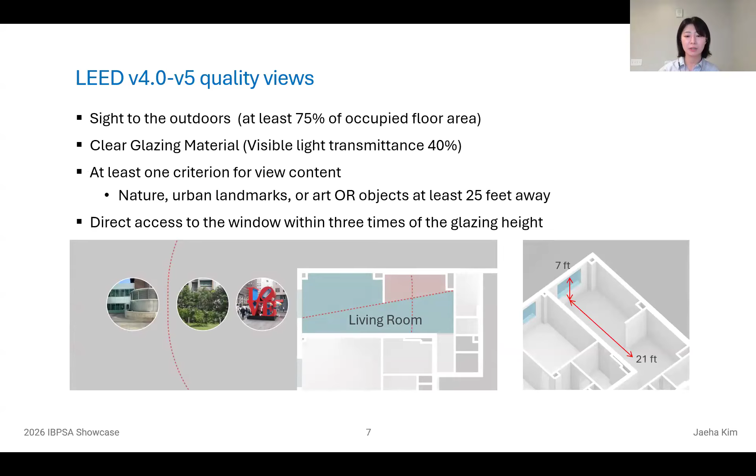Current view quality evaluation standards are very limited. LEED has a binary pass or fail system based on things like outdoor sightlines, glazing transmittance, and view content. The European standard EN 17037 is more nuanced. It rates view across 3 levels based on horizontal sight angle, distance to visible objects, and number of visible layers like sky, ground, and landscape. But the critical question is, do these match how people actually experience views?

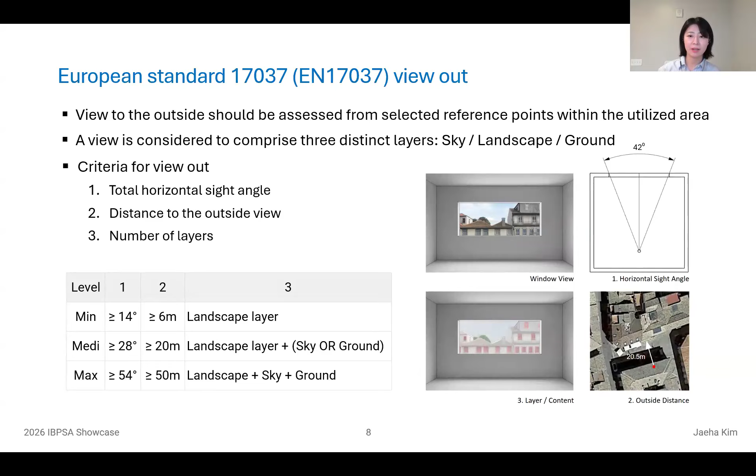Let me show you why the answer is often no. Here's a real housing project where the architect carefully designed window sizes and positions. LEED said all floor area qualifies, and according to the European standard simulation results, most of the area has failed. But when you look at the actual view image, it's a thoughtfully designed space. These oversimplified criteria miss a lot.

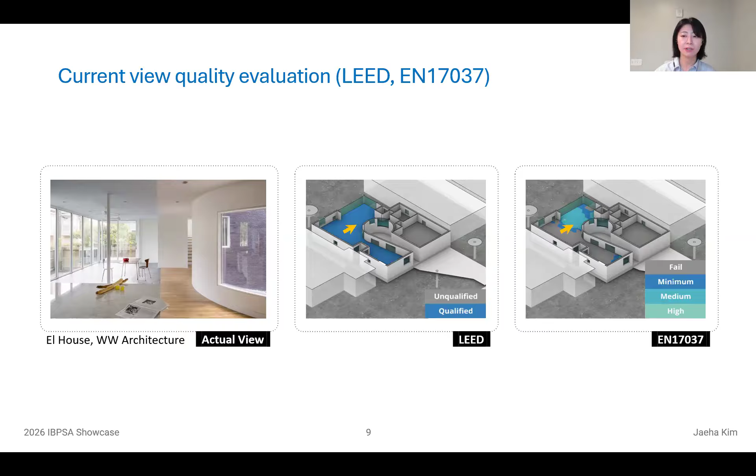We need something better. However, the scale of the challenge is staggering. To test all the relevant combinations of view factors, window dimensions, room types, and spatial conditions, we need to evaluate almost 86 quadrillion scenarios. That's obviously impossible for one research team. So we've built a collaboration across Cornell, UC Berkeley, New Jersey Institute of Technology, and Singapore University of Social Science, with a shared protocol for systematic data collection.

Before collecting data at scale, we need to know which experiment method actually works. We compared physical space experiments, virtual reality, and online image surveys across 5 satisfaction categories. The key finding: for measuring view content and overall satisfaction, digital image and virtual reality experiments both work as well as physical space experiments. That means we can scale up data collection dramatically without sacrificing validity. This is the foundation everything else builds on.

Using our validated protocol, we collected over 13,000 human satisfaction ratings and built the Window View ImageNet dataset. The surveyed responses show a clear, consistent trend. Large windows with sky views score highest. Small windows facing neighboring buildings score lowest.

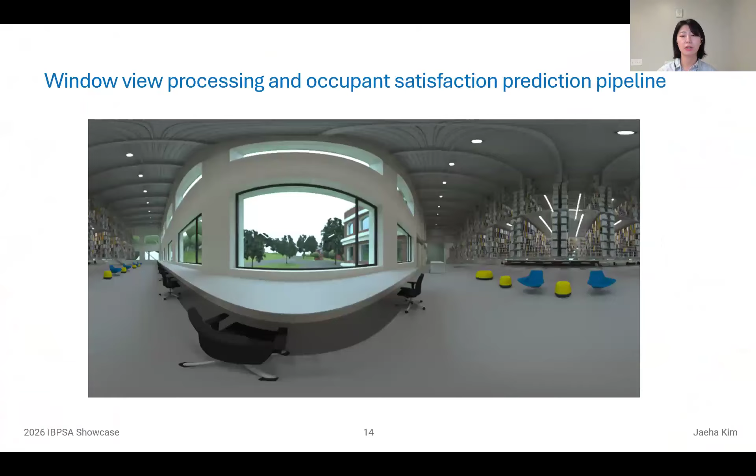To extract features from these images, we use semantic segmentation to identify object types such as tree, sky, building, roads, and depth estimation to measure how far those objects are. The pipeline crops to the human vertical field of view, extracts 23 spatial and visual features, and feeds them into an AutoML workflow using gradient boosting models. We link those features to the human satisfaction scores and train the model. The result: a system that can predict occupants' view satisfaction from a 3D model alone.

To test whether our model generalized beyond the lab, we ran an in-person experiment at the Hasbrouck Apartments here in Ithaca. 24 students toured 16 views in person. 282 US residents rated the same views online. The ranking of preferred views matched, with no statistically significant differences between students and the US population. And when we looked into demographic effects, we found that women rate views slightly lower than men for the same scenarios, and older adults tend to be more sensitive to privacy. These are real design implications, especially for senior housing.

We then tested the model in a much more demanding context: 24 residential units across 12 building archetypes in New York City. 66 participants spent 2.5 hours rating views in person. When we compared their satisfaction scores against our model, called View Score, against LEED and the European standard, the results were clear. View Score achieves a correlation of 0.68 with human satisfaction, which is higher than LEED and European correlation coefficients. On our validation image dataset, the ML model explained 81% of human satisfaction variance, with only a 9% error rate. For something widely considered immeasurable and subjective, this is a meaningful result.

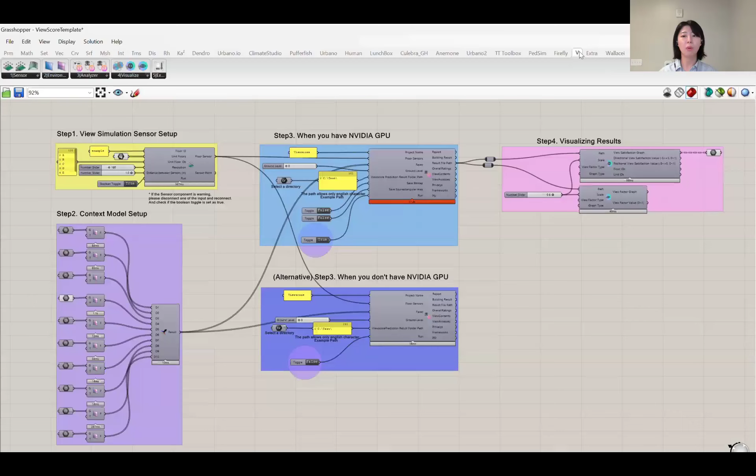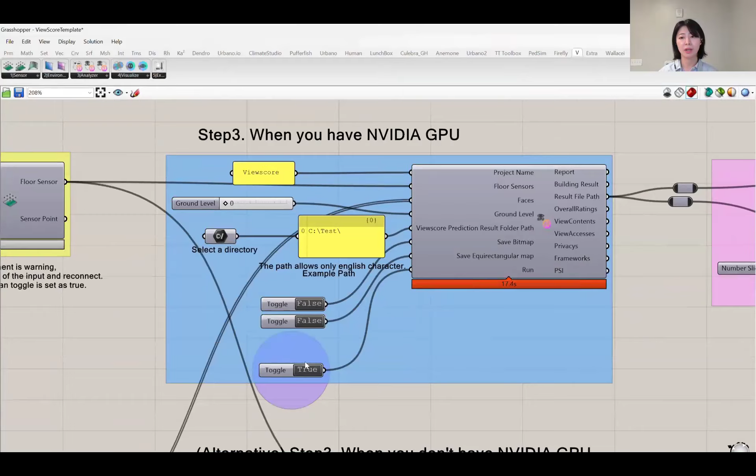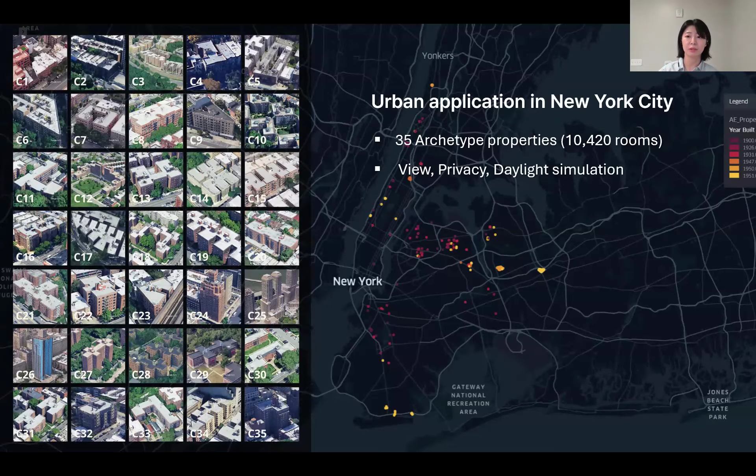Finally, we applied ViewScore at the city scale. In collaboration with a New York City property management company, we simulated view, privacy, and daylight across 35 residential building archetypes, totaling 10,420 rooms. The findings are sobering: 71% of rooms have unsatisfactory views, and over a third of floor area has visual privacy issues. Building density is the dominant driver of view and daylight quality, while privacy is largely floor-level dependent. We are using these results to establish evidence-based benchmarks that can inform both design practice and housing policy.

To wrap up, what I've shown today is a workflow for turning subjective human experience into a quantifiable, simulatable design variable. We started with views, but this same pipeline can apply to acoustic quality, texture preference, spatial comfort, any qualitative factors that matter to occupants.

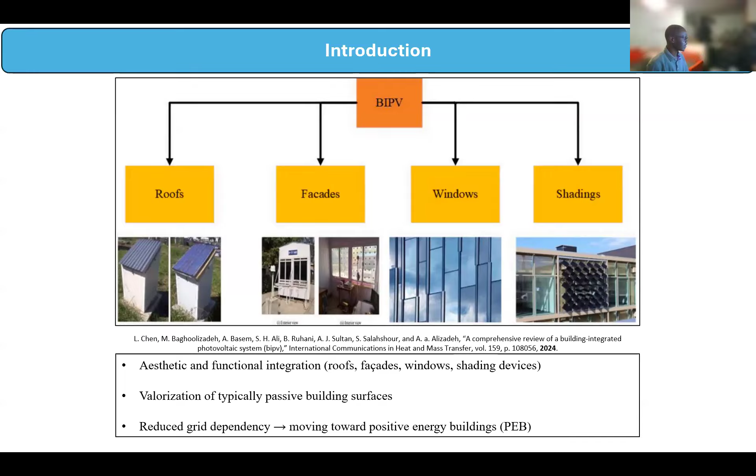The BIPV consists of integrated PV modules in buildings, and it enables producing more energy. Now we are using this PV in every way in buildings, like in the roofs, facades, and windows. For people who work on developing artificial models to predict PV systems, it's interesting to have PV data sets for the production of buildings—for example, every 5 minutes or 10 minutes—to develop predictive models.

Now I'm moving to the proposed solution. Our simulator uses many types of data: the modules or the PV panels, the consumption profile of the building, and some meteorological data of where the building is located. We also integrate some financial parameters and the panel dimensions, and identify the blocked area, which is where we can't integrate a PV module in the building dimensions.

So we're going to do some processing and sizing here to generate the physical optimal capacity and the capacity we need. We're going to run an optimization process to have the most efficient cost and to rank the modules to find the best ones to integrate in the building. Finally, we're going to generate a 3D representation of the modules in the buildings.

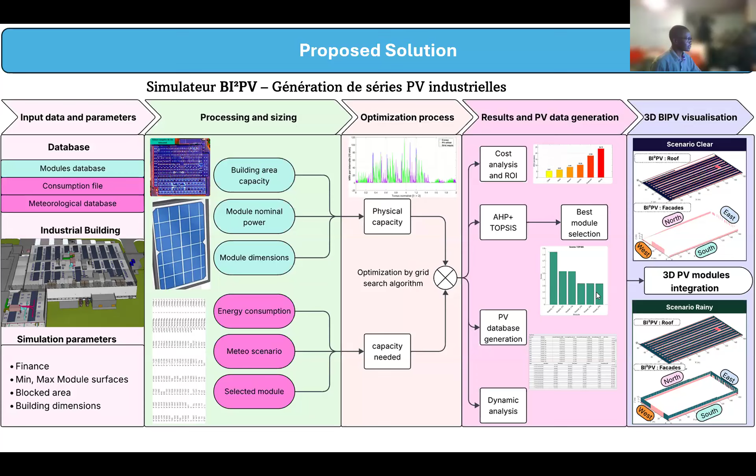So we have also many scenarios, like if we are in the clear sky, or if, for example, we are in the rainy climatic zone.

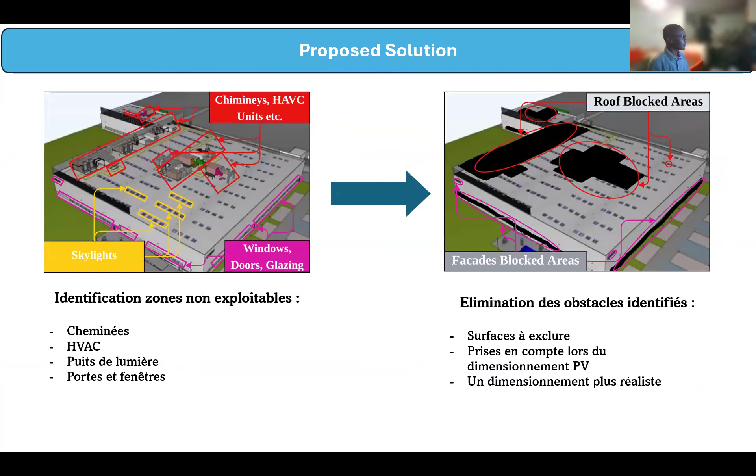Here we have some illustration of how our simulator works. So we identify all the blocked areas, and after that we do this for the integration of the PV integration.

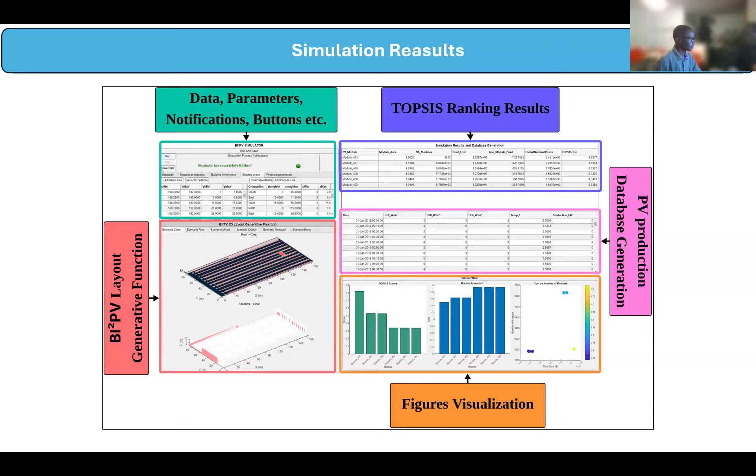After the simulation, we have the 3D representation. The most interesting thing in our simulator is the dataset we get at the end of the simulation, and it enables us to develop an AI model to predict the production of the building, which we use later for a smart, predictive energy management strategy system.

So here we have a video to show how our simulator works. Here we have the database we have to integrate. Here the meteorological database.

So here we load the database, and for the consumption also. And here we are also going to load the database for the blocked areas.

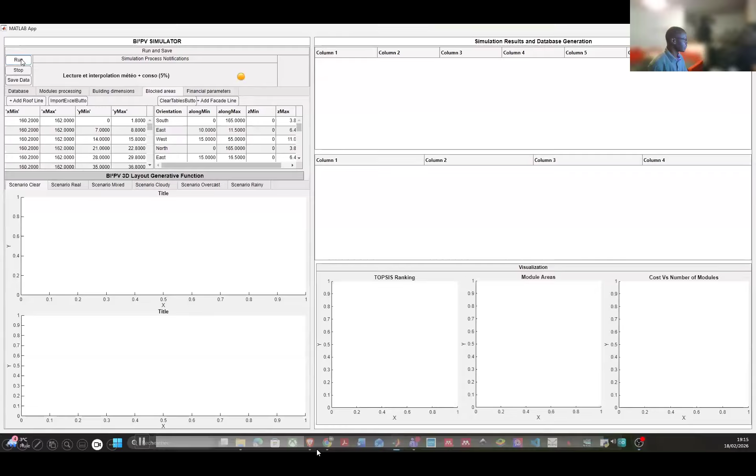And we run the simulation here. So we can see the progress of the simulator.

This simulation was developed with MATLAB App Designer. At the end of the simulation we have the ranking of the 5, or actually 6, best modules, and here we see that module 451 is the best one, and we use this to integrate in the simulation.

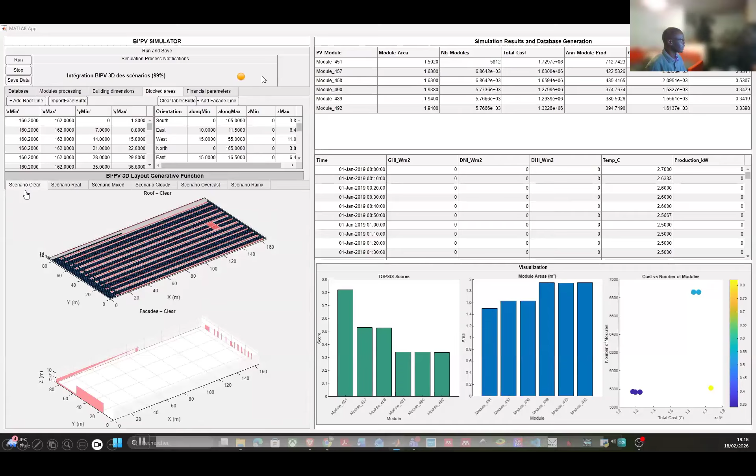So here we have all the scenarios. Here is the clear scenario. Here we have the real one, and we have others like, for example, the rainy one.

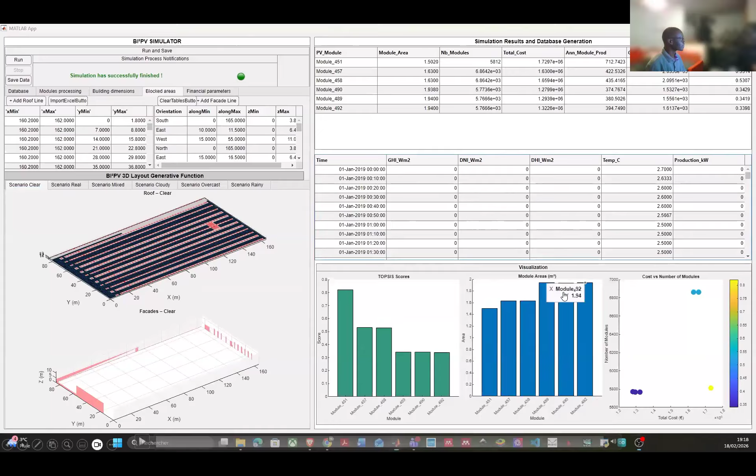And here we have the database of the PV production every 10 minutes for 1 year. And here, for example, for the real scenario, we have more than 5,000 panels to integrate on the roofs and the south facade only.

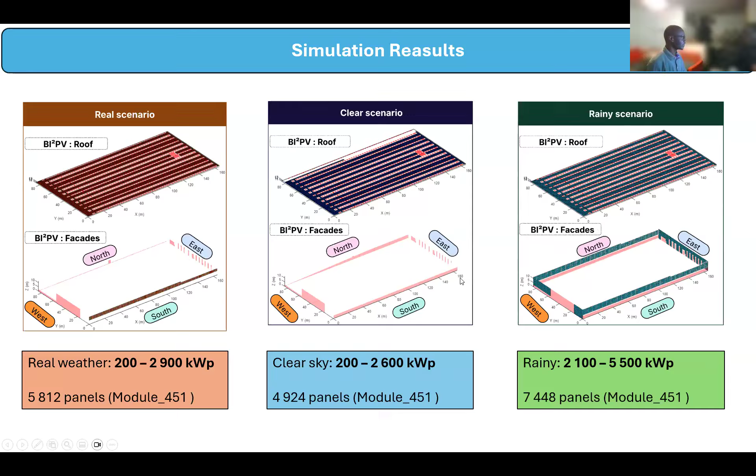And for the clear scenario, only the roofs were exploited, and for the rainy scenario we need more panels, so we use all the roofs and all the exploitable area on the facades.

So for conclusion, this simulator was developed in MATLAB App Designer, and we use the whole workflow, going from the weather data, to scenarios, to the models, to the optimization of surfaces, and economic validation.

A multi-criteria decision framework based on AHP and TOPSIS was also used. For the capacity, for the clear sky scenario with mini modules, we can go from 200 to 2600 kilowatt peak, and for the real weather, from 200 to 2900 kilowatt peak.

So the best compromise for the real scenario is Module 451, and we had a return on investment of 6.45 years. We also have the dataset, and this work was published in the Energy and Buildings journal.

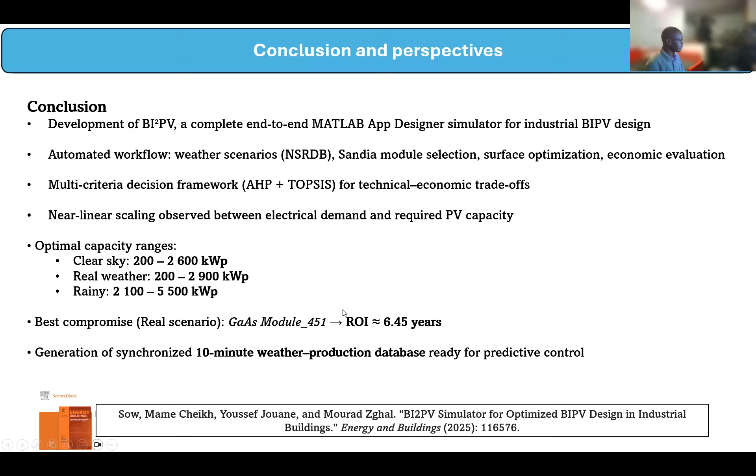For the next work, we are going to use the database to develop our predictive energy management in PV grid systems.

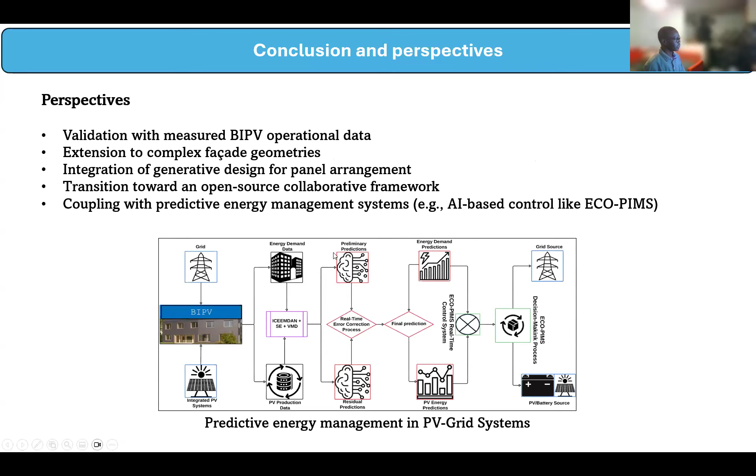We're also trying to work on this simulator to develop an open source version, to enable others to have free access to this simulator. Thank you for your attention.

Thank you so much, great job. I'm curious if your tool is going to be available to the public or if it already is.

Is your tool available for other people to use, or is it mainly internal use right now? Right now it's not, because it's only usable in MATLAB, so if you don't have the license, it's complicated to use.

So we're trying to work on it, to translate the code, for example, into Python, and to develop a free version for everyone, especially for students to use it.

And for industry, for example, if industrial users want a tool to know how to integrate some PV modules in their buildings, yes, it's usable.

Got it, thank you. Well, great job, thanks so much.

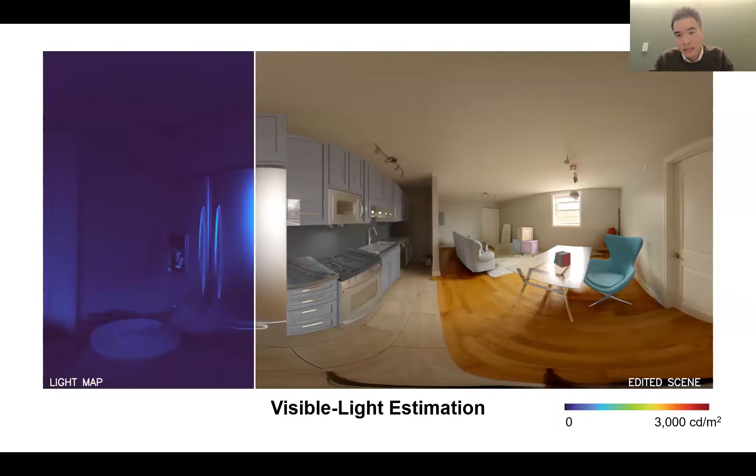From left to right, it's from captured scene to edited scene. So it's more like a visualization, and in this process we don't need any commercial software. And specifically for building performance, we care about the absolute light level. So here we also care about the illuminance. From left to right, we can convert the rendered image into absolute scale.

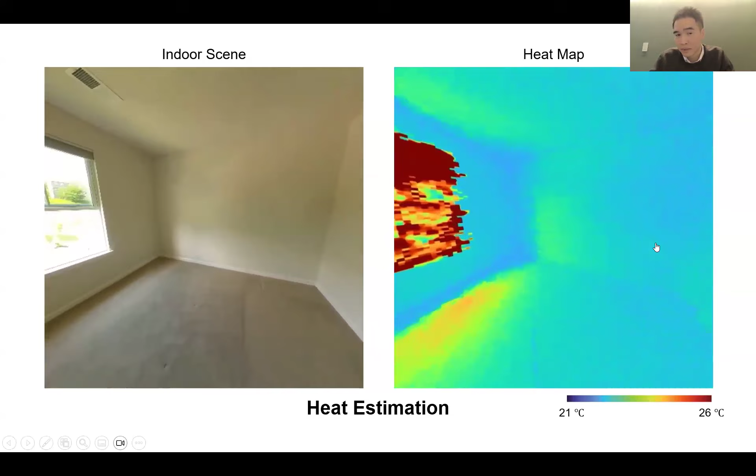And next, because light also brings heat, for this project we are also trying to estimate indoor heat from visible light. So we assume all the heat comes from outdoor and comes from sunlight. And we can easily crop the panorama into a 2D perspective view and see the whole space from 360 degrees.

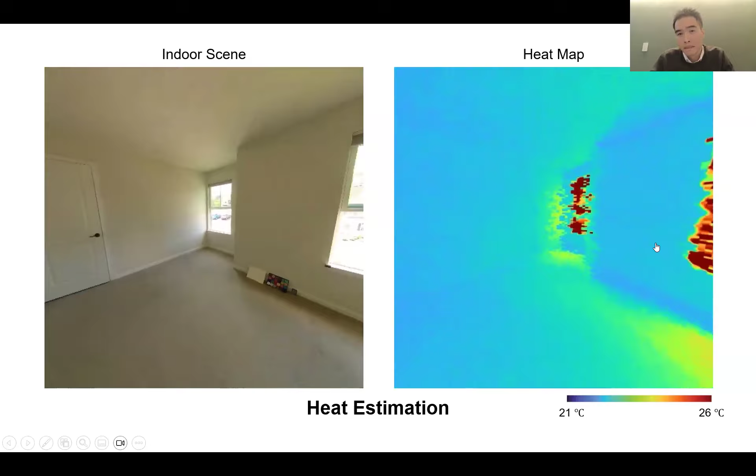Next, about the background. For this project, we mainly focus on the housing market in the US, especially existing homes. By the third quarter of 2024, we have over 147 million housing units, and specifically over 4 million existing homes on the market. So we have millions of homes, but we don't have millions of architects or practitioners in building performance simulation, right? So we need something easy and simple to estimate the light and heat.

So in this case, we focus on image-based tasks, and we are trying to understand what's going on from the image. Let's say here's a single panorama. A lot of existing studies detect the wall corners and generate this shoebox model. It's a simplified model, and all the textures are classified into the wall and floor planes. In the meantime, other computer vision and graphics studies can classify indoor objects into different categories. Here we can see the door, floor, and the ceilings, all labeled in different pixel colors.

And if we could capture a single outdoor image, we have both indoor and outdoor information. We can estimate the indoor shading layer, and we can estimate the indoor material properties. So we have a lot of information so far. In this study, we are trying to build a design and simulation pipeline, trying to understand the physics behind the RGB image.

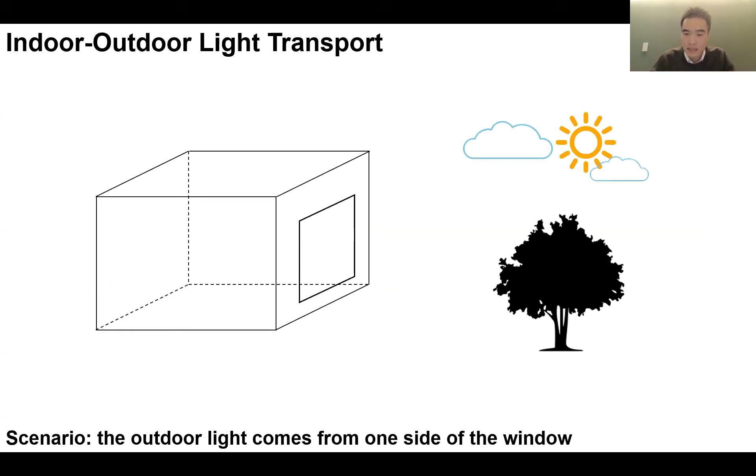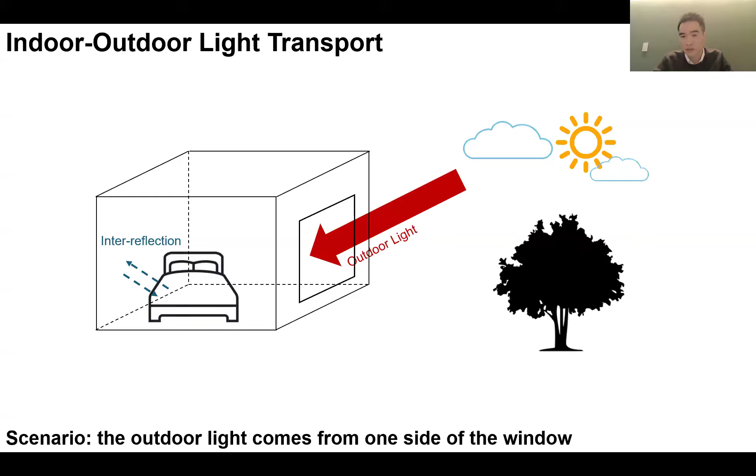For visible light, the most basic scenario is a shoebox model, a residential space with a single window. Outdoor light comes into the indoor scene. Different indoor objects have different material properties. In that case, we can shape the indoor appearance using physics-based rendering. So we have to capture both indoor and outdoor scenes. That's why we need both indoor and outdoor images.

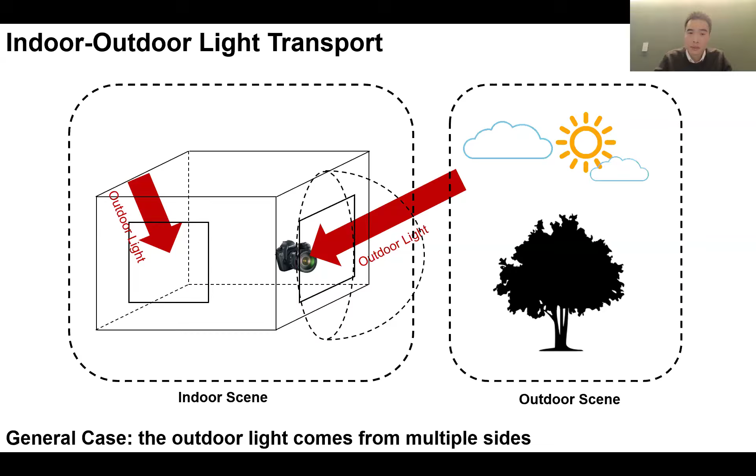However, the more general case is that we have multiple windows. If we just have one single window, we can use a single camera with a fisheye lens to capture the fisheye image from indoor to outdoor. But what if we have one more window opening? What could we do? We cannot just bring one more camera; it would just increase the complexity of the pipeline. So we use a 360 camera named Ricoh Theta Z1.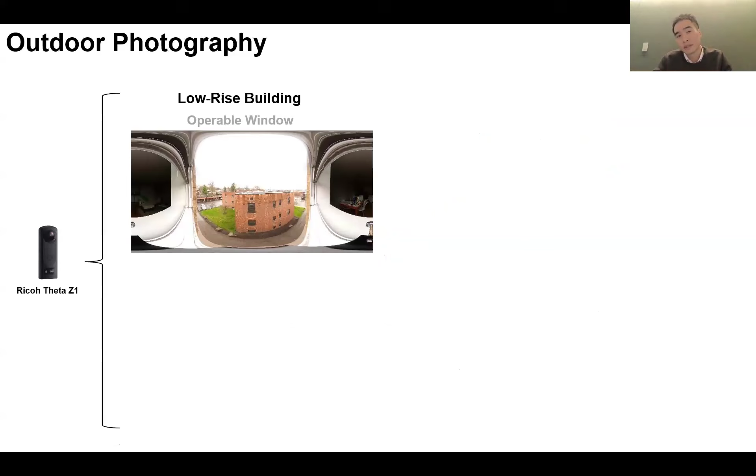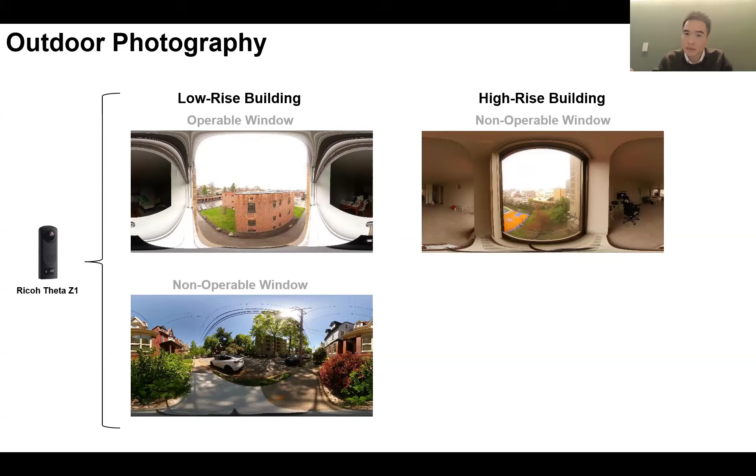We capture the outdoor scene in different scenarios. First, for a low-rise building, if the window is operable, we can just fix the camera at the window sill. If the window is not operable, we need to go outside to capture the outdoor space. For high-rise buildings, it's common that the window is non-operable, so we place the camera near the window. And if there's a balcony, super, then we can capture the outdoor space. For indoor, we use a mobile app to control automatic HDR photography, so both indoor and outdoor images are captured in HDR format.

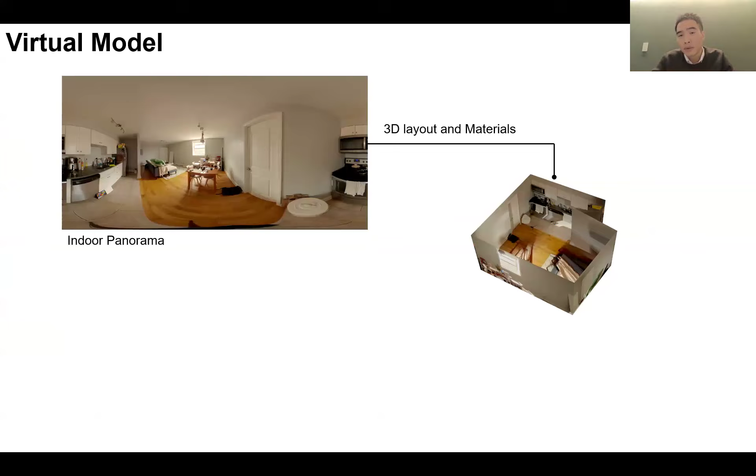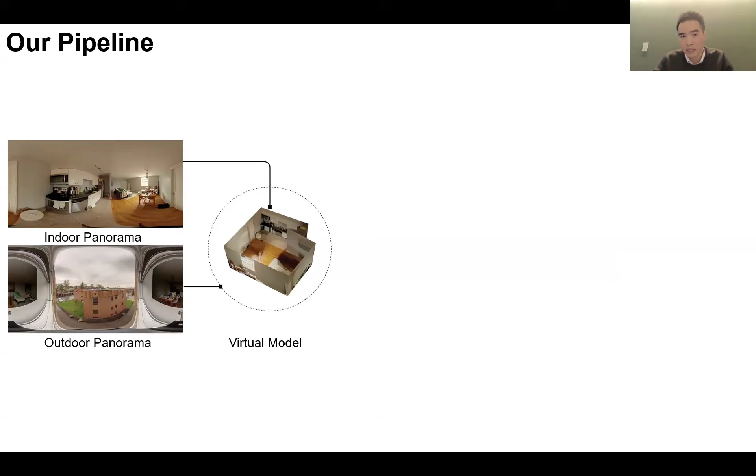Next, if we want to achieve physics-based rendering and simulation, we need to build a full virtual model. So we use the indoor panorama to estimate the 3D layout and the material properties, and the outdoor image serves as the environment map. Using this approach, we build this virtual model, but the interface here is fully virtual. We don't have a graphical user interface like Rhino or DesignBuilder to manually edit anything. Everything is behind the scenes at the back end.

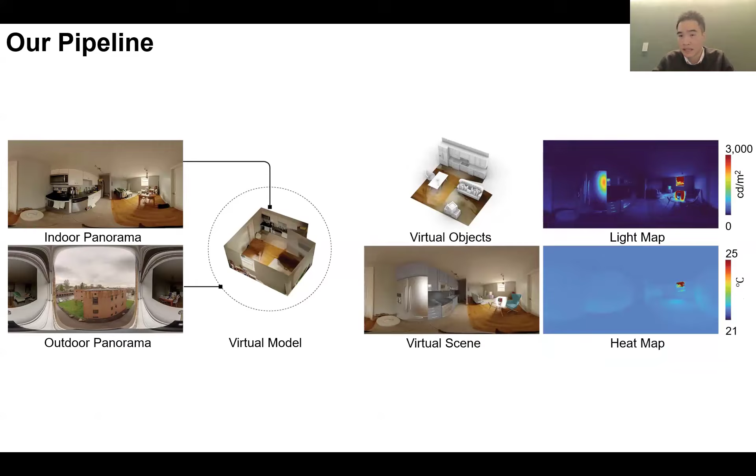Then we place different virtual objects and virtually render the new scene with new furniture objects. And because we care about the physical meaning behind the RGB pixels, we estimate the light and the heat after the rendering.

So for indoor light estimation, the workflow is: we have a single image, we estimate the geometry, light, and materials. And here it is important to note that for now, in this study, we assume the materials are Lambertian. And then we output a new rendered image, and we can estimate the light map.

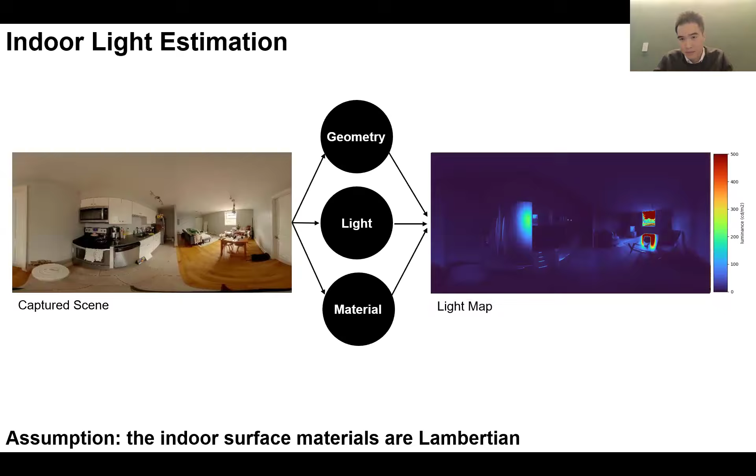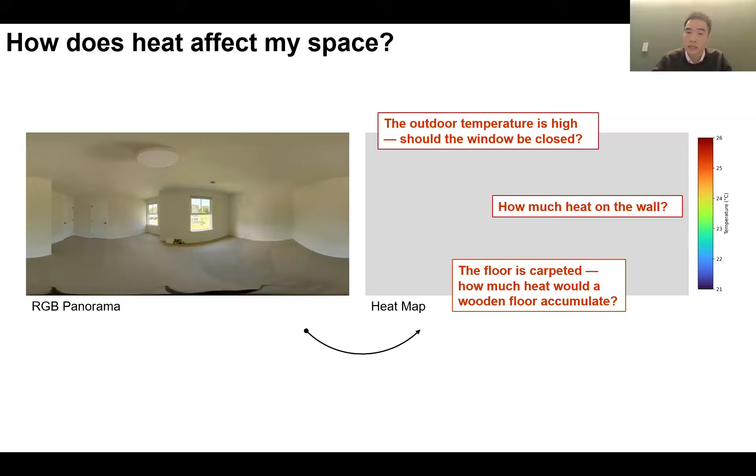For heat estimation, the thing is that if we have a single RGB panorama, we have achieved virtual staging. But what if another panoramic image could tell us the outdoor temperature is high, should the window be closed, or how much heat is on the wall? And if the floor is carpeted, how much heat would a wooden floor accumulate? Because the light brings the heat, to estimate the heat we follow this pipeline, and for the heat we have different components for heat transfer, like radiation, conduction, and convection.

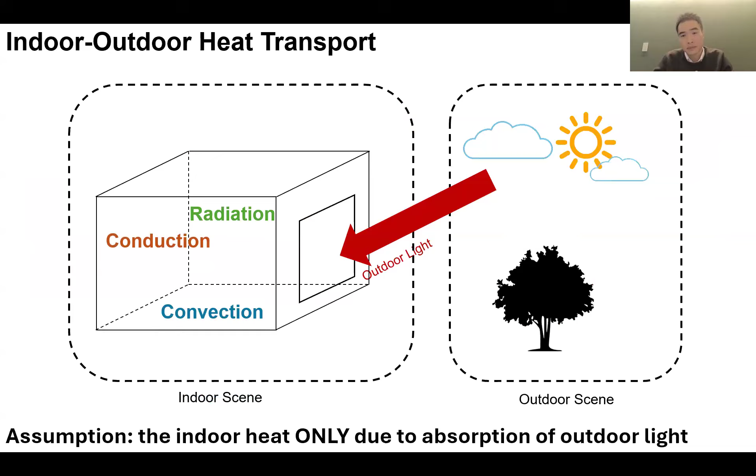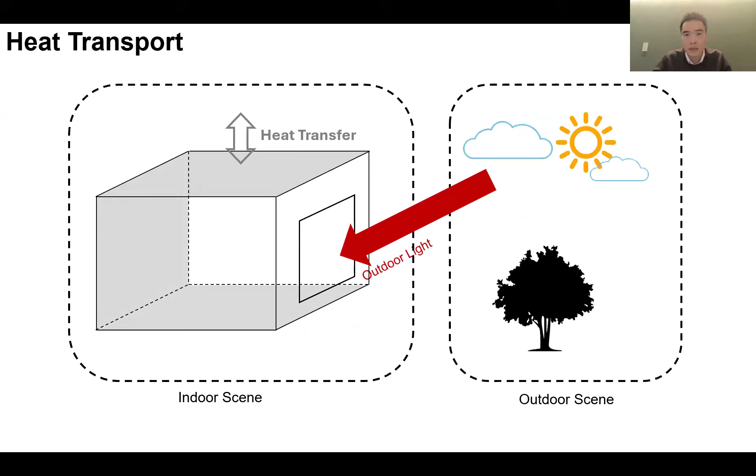In that case, it's not that simple, because in a real-world scenario a single room could be on a rooftop or in the basement. So we can also customize whether there is heat transfer between indoor and outdoor. If it's in the basement, we assume the heat transfer is minor. But if it's on the rooftop, we get a lot of heat from the sunlight. So we further modified this equation and incorporated indoor-outdoor heat transfer into the simulation, so we can simulate the real-world scenario.

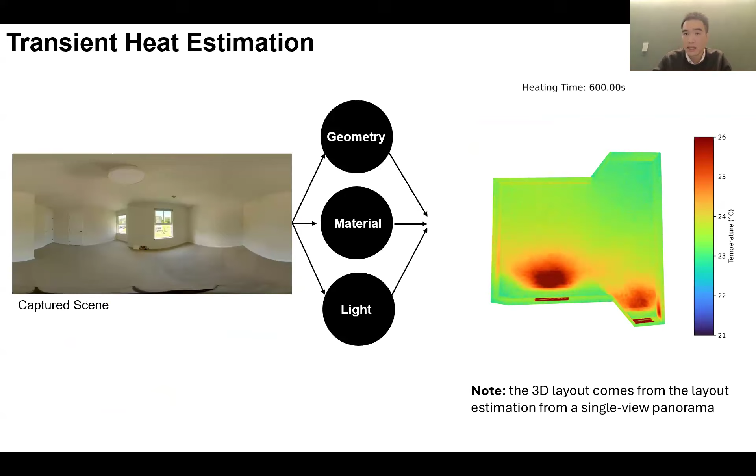Let's say we have a single RGB image. We estimate the geometry, material, and light. On the right, we view the 3D model from the top view. It's also important to note that the 3D layout comes from layout estimation. Sometimes the wall corner is not 90 degrees, which is a limitation of layout estimation. But overall, we can estimate transient heat from a single RGB image.

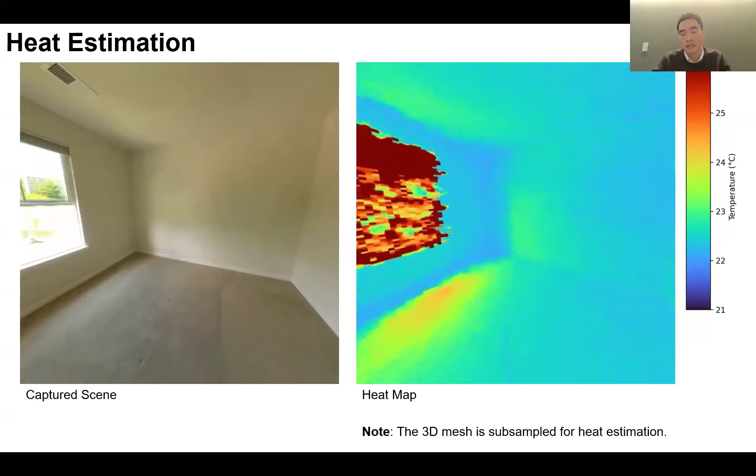And this is a demo video, so we can view the space from 360 degrees. We also tested different rooms. From the panorama, we can always easily crop it into a 2D perspective view. And because the area near the window always receives more light than other areas, we see more heat generated near the window area.

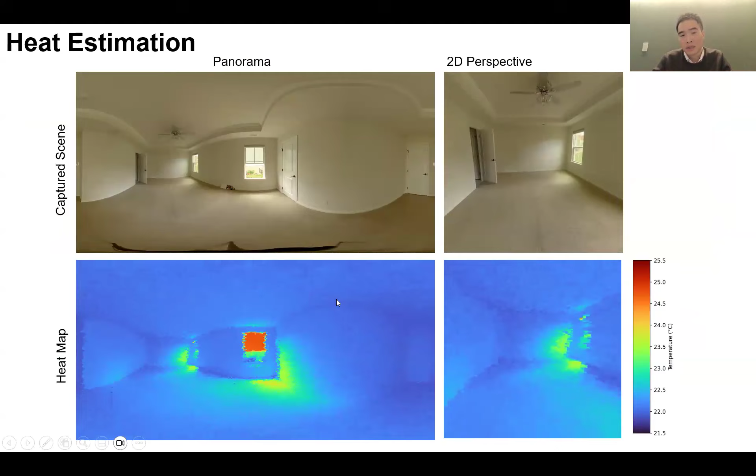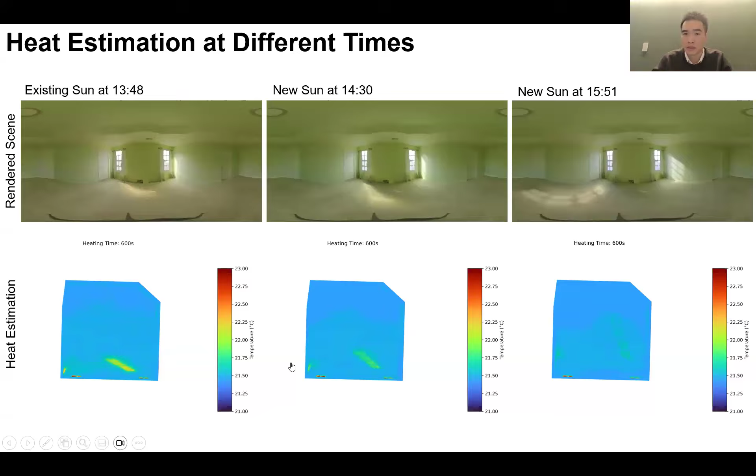Next, we can also use image-based rendering to change the outdoor image. Once we change the outdoor image, we can estimate different indoor heat at different times of the day. So the application is that we only need to go to your house once, then we can estimate the sun position at different times. For a virtual home tour, we don't need to ask a housing agent to visit the house multiple times, which is not efficient. And here's another view of the result from a panoramic perspective, showing how the sun changes.

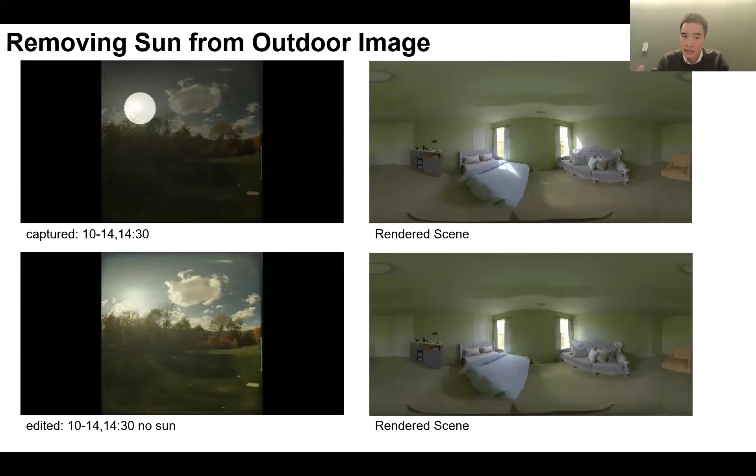And here's the application. If we can change the outdoor image and then customize the sun position, we can simulate the light in the indoor space at different times of the day. And sometimes when we visit the house, it's not always sunny or not always cloudy. So if we capture an outdoor image based on the GPS location, the camera pose and the time of day, we can find where the sun is on the 2D image. And then we can easily choose, okay, let's wipe out the sun and see how this space looks under an overcast sky.

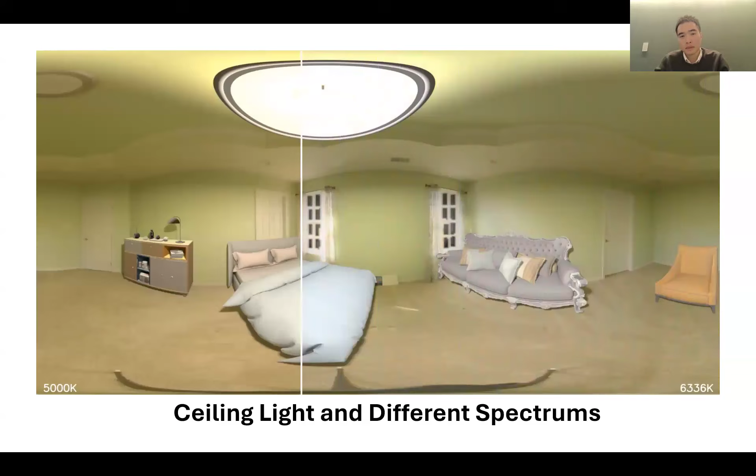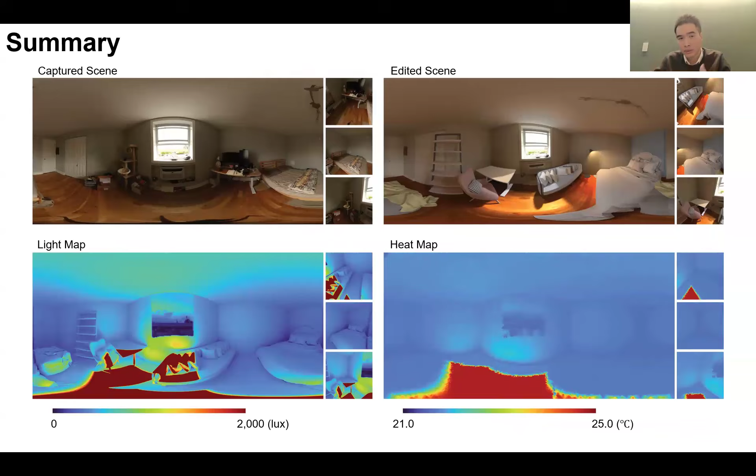Next, to summarize this work, this work achieves this pipeline. We have indoor plus outdoor images. Then it takes a few minutes to achieve virtual home staging and analyze the light and the heat. And overall, this is the pipeline. We have captured images as the input. We output an edited scene, and then we can use this tool to do lighting estimation and heat estimation.